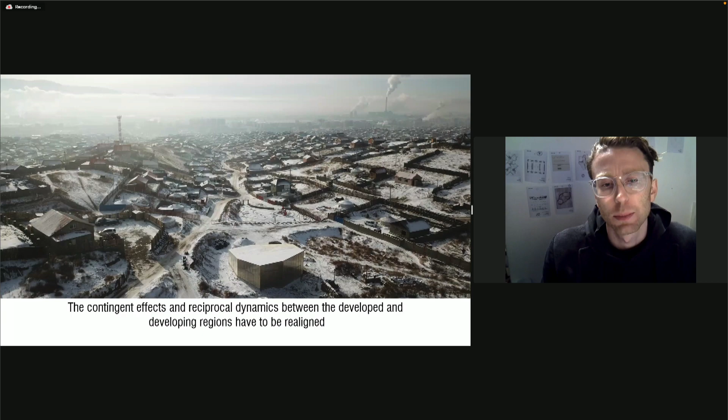However, our responsibility to shape these profound urgencies has become diffused and displaced. It's not me or us, but it's somewhere else and seemingly inevitable. The contingent effects and reciprocal dynamics between the developed and developing regions have to be realigned.

DDU's position hinges on the fact that sustainable investment and green finance are an opportunity to act and address this disparity. However, there's a lack of funds being directed towards the built environment in the developing world, and so the main hurdle for investment is a lack of packaged, bankable, and scalable projects.

So this is where DDU comes in. We connect sustainable finance opportunities to scalable housing products and urban infrastructure. We integrate research and analysis to deliver evidence-based, high-impact projects. We act where conventional methods of development stagnate, and we develop strategies that scale.

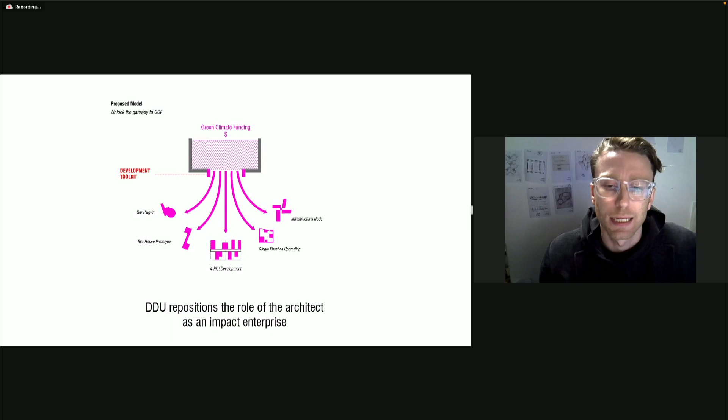So the method and position of DDU aims to reposition the role of the architect in these areas from the architect as service provider to this notion of the architect as an impact enterprise.

This method is enabled by the research conducted at the Rural Urban Lab at the University of Hong Kong with Professor Bolchover. And so through the lab, we work closely with NGOs, local academics, government, and professionals in the construction industry to identify opportunities for intervention and develop innovative solutions.

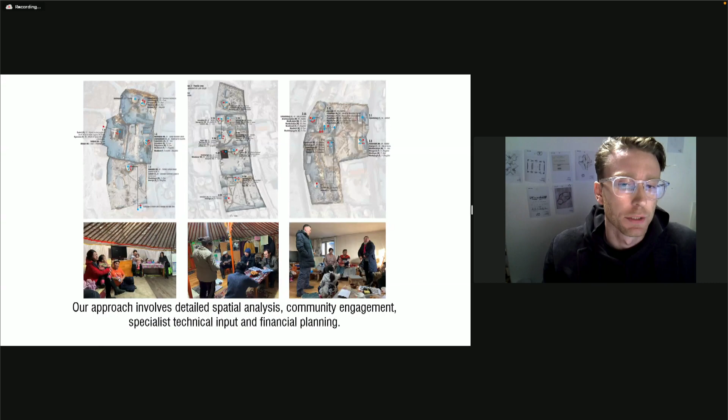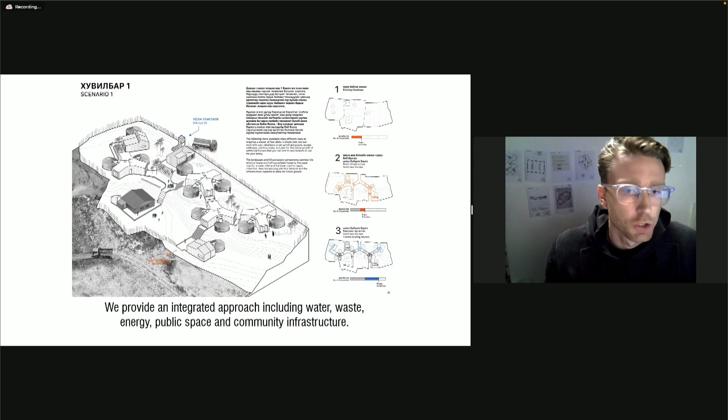Our approach involves detailed spatial analysis, community engagement, specialist technical input, and financial planning. And we provide an integrated approach that includes water, waste, energy, public space, and community infrastructure.

We build pilots first to verify performance before scaling production. We then test and analyze these pilots so that we know what we build works.

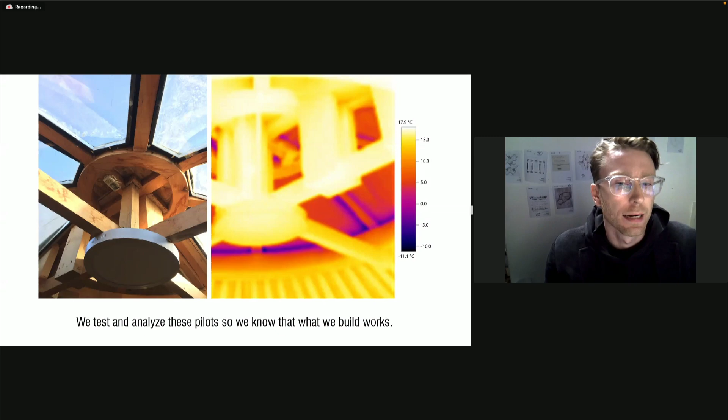And so the impetus for DDU emerged as a model of practice through our work in Mongolia, where the team has been researching and practicing since 2014. And through this work, we found that conventional modes of development were stagnating to meet the emergent conditions of the residents. So the reimagining of Ulaanbaatar from a Soviet city to an investment capital in 1991 fueled the desire for many to leave the countryside and move to the city.

Since 1991, the urban population has doubled. The city's administrative territory has expanded to over 35 times its original size.

840,000 people, which is 60% of the city's population, live in these informal settlements that surround the periphery of Ulaanbaatar, which are known as the Ger districts.

And so through this process, the once nomadic vernacular tents, or Ger, which enabled assembly and disassembly while herding on the steppe, it now finds itself bound within the fenced plot of the Ger districts. Despite this, however, life within the Ger remains unchanged.

And the transition, though, has forced these residents to confront new issues specific to the urban condition, such as living with neighbors, traveling to collect water, digging pit latrines as there's no sewage infrastructure in the Ger districts, and coping with urban pollution, as each Ger district household uses approximately 4 tons of unrefined coal as their main heating source each winter.

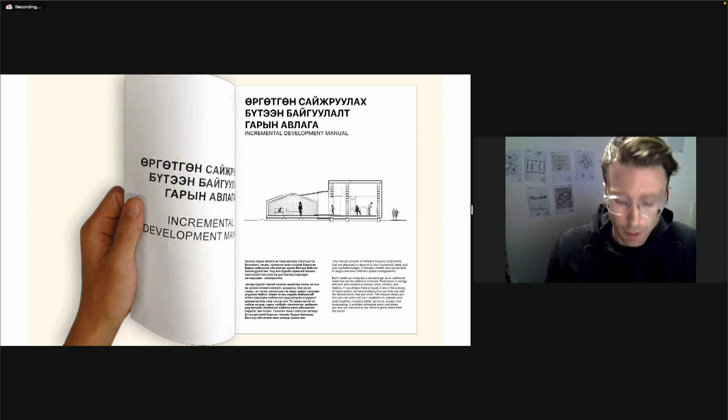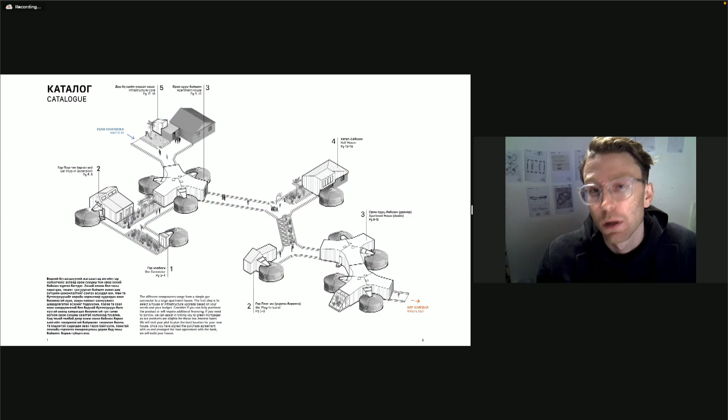We made this strategy available to residents through a document distributed throughout the GER districts, the Incremental Development Manual. This incremental strategy demonstrates a collaborative approach for neighboring families to provide decentralized infrastructure and energy efficient housing with improved thermal performance, reduced carbon emissions, and built-in sanitation, all without the need to relocate households.

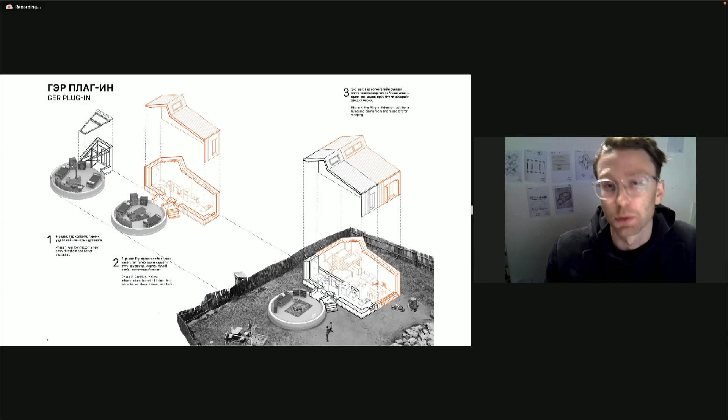Within the manual are a series of housing products that residents could choose from and embed within this infrastructural framework, depending on their needs. This is the GER plugin, now with the capacity to grow as the household's needs transform over time.

The apartment house addresses the different household structures found in the GER districts. It's a flexible house that can be used by one large extended family or divided into 3 separate units, each with their own shower, toilet, heating system, and kitchen.

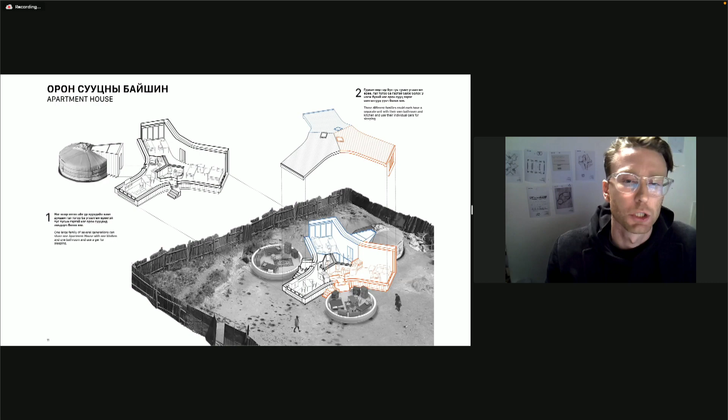According to our market research, there's over 65,000 households prepared to purchase a home in the next 5 years. Our aim is to scale up our capacity to build maybe 100 houses in the next 3, in order to prove that this strategy can have an impact at scale.

To do this, we've set up a local company with local partners, and we're building a demo site of the strategy, which will allow us to demonstrate the houses to residents, local green banks, government officials, and other development agencies, as well as to audit the buildings to prove that they perform as we claim.

The project is beginning to demonstrate some support from residents. There's a video of it made by a local media personality that received over 1 million views within 2 weeks, which is almost equal to the entire population of Ulaanbaatar.

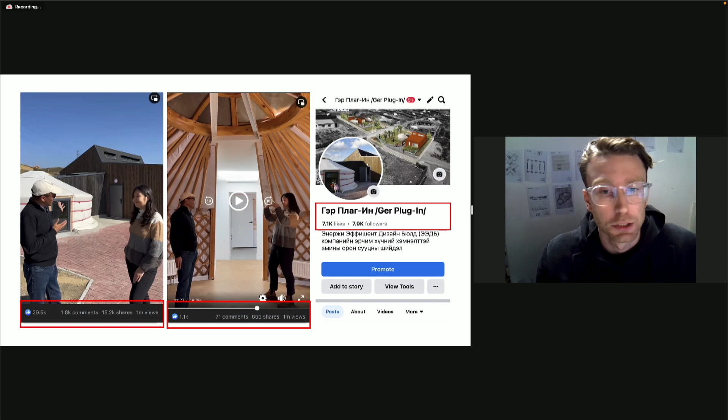The support is important because the potential for impact is so great. If each of the 163,000 GER households was replaced by a GER plugin, this would result in an estimated savings of 576,000 tons of coal per year.

Residents will have direct access to clean water, sanitation, and sewage, and air quality will improve, which will keep residents healthy. While we continue this work in Mongolia, we are testing the method and DDU model to see that it can be applied in other rapidly developing areas. Our work in Nepal is in a more preliminary piloting stage.

In 2015, 2 earthquakes struck Nepal, damaging or destroying over 1 million homes. While there's been a significant effort to rebuild the rural housing stock, only 38% of the homes in the Kathmandu Valley, Nepal's most populous urban center, have been rebuilt.

This restriction to urban reconstruction has actually fueled urbanization of rural territory, as those who cannot rebuild in urban contexts are retreating to build in the periphery where construction is easier or more affordable. These are images from a recent visit just a couple weeks ago in Kathmandu, where the effects of that earthquake are still very much a part of the urban fabric.

Rural-urban migration after the earthquake has accelerated Kathmandu's growth, despite it already being one of the world's most rapidly urbanizing regions following this transition to cities during the 1996 to 2006 civil war.

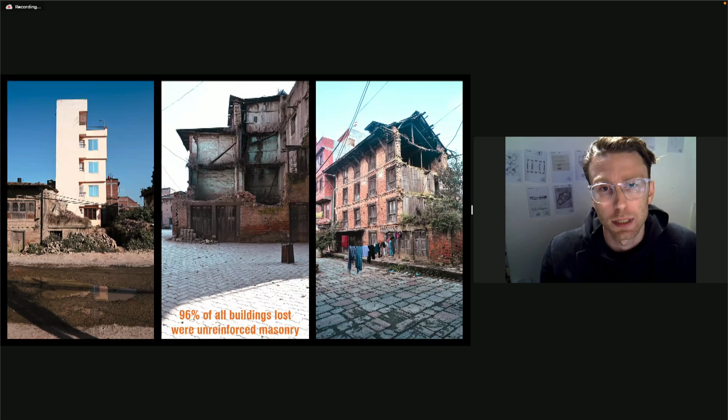Despite mounting efforts from conservationists, building in the traditional manner is no longer popular amongst residents due to the building's failure in the earthquake, but also the fact that they're 74% more expensive to build than concrete frame brick infill construction.

Kathmandu residents' desire and necessity for a modern home began when the country opened to the world for the first time in a century in 1951, which brought a wave of foreign influence via media, financial aid, development agencies, as well as concrete as a new material in the valley. This led to concrete frame houses multiplying in the city's periphery.

This has accelerated in the turbulent decades since, and even more so after the earthquake. The clearing of damaged buildings has resulted in many empty vacant sites, which revealed a lack of clear records of land ownership and disputes between generational families.

When there's more than one inheritor, land is subdivided equally, and the escalating cost of land in Kathmandu has increased pressure to obtain separate land ownership rather than sharing with one's siblings as was done in the past. As a result, very narrow buildings are built, often as small as 15% of municipal recommendations, but also extremely vulnerable to future earthquakes.

Otherwise, the resulting divided land is often too small to build on at all, and so it remains vacant. In some cases, existing houses are physically split and redeveloped while the original half is still occupied.

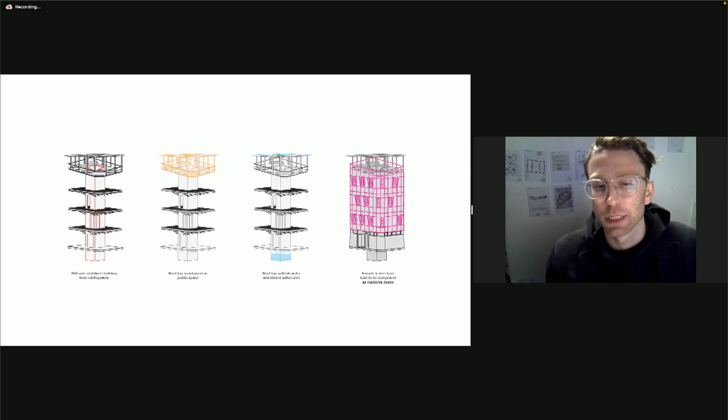The prototype structure is comprised of a central reinforced core with cantilevered beams to hold up the floors. This removes the need for any columns or foundations on the site boundary, which limits potential damage from neighboring buildings, a significant cause of failure in 2015.

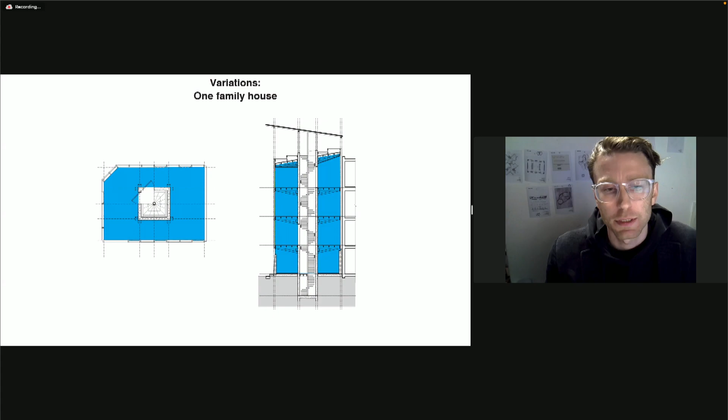This central stair within the core can either be shared or scissored depending on the resident's preference. This enables the house to be lived in as a single collective family house, divided vertically between siblings or two families, as well as split floor by floor into apartments for rental tenancy, which is becoming increasingly popular.

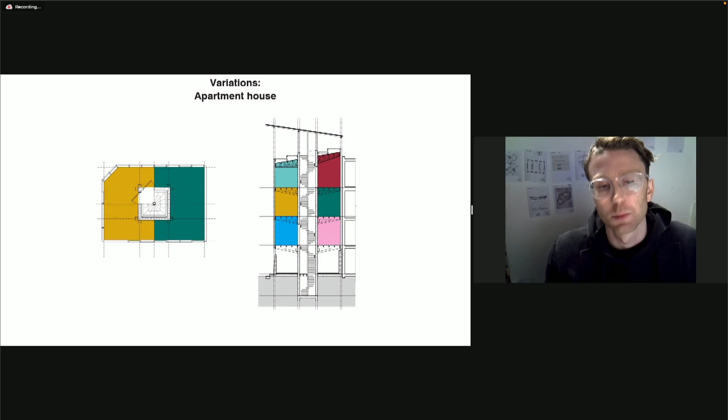The provision of this flexibility aims to address the land disputes that have been withholding reconstruction. The prototype adheres to the spatial qualities of the traditional settlement by allowing for a flexible ground floor, enabling traditional urban features such as an open shop front, courtyard to street passages, and ground floor public spaces for gathering.

In comparison with the conventional concrete frame, the design reduces the use of concrete by 58%. The prototype also allows for more lighter, sustainable cladding options than the typical fired bricks.

We've been working with local carpenters to design a facade system using salvaged traditional building components, which also contributes to the criteria of heritage settlements.

Preliminary costs from local contractors have come in around the same cost as concrete frame construction, which is critical in order for this prototype to become scalable.

The next step will be to pilot the project to confirm these speculations and integrate it within a manual for residents, development agencies, and government ministries, just as we've done in Mongolia.

Additionally, we're starting to map these other types of infill sites for future versions of house prototypes to be able to respond to.

So finally, I'll touch very briefly on our work in Manila, where over 3 million people live in inadequate housing without access to infrastructure or sanitation.

Manila offers another view of this process of becoming urban, where informal settlements have had to occupy this kind of infrastructural space as flows of foreign investment in urban real estate have driven the unaffordability of housing for decades. This has forced residents into these kinds of areas.